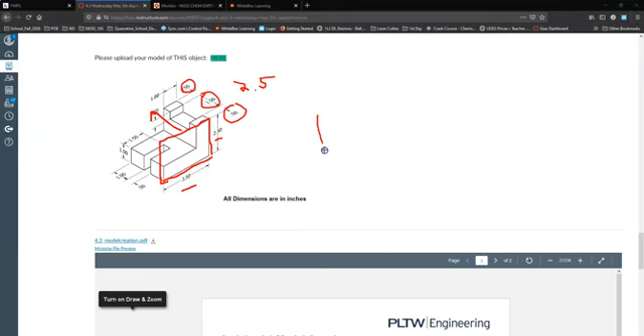So we're going to make a rectangle in Fusion that is 3.5 by 2.5, and then we're going to extrude that 2.5 as well. Then we're going to come back and start to make some cuts. We'll cut out this shelf, and we'll come back and cut out the 2 notches.

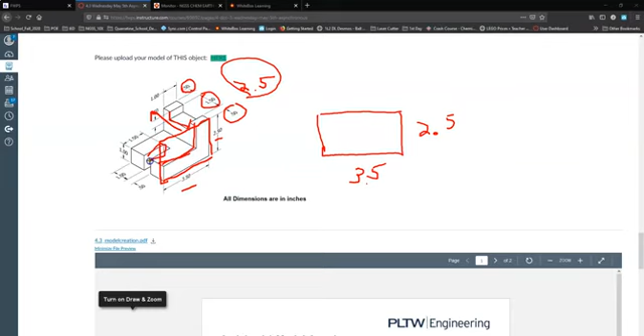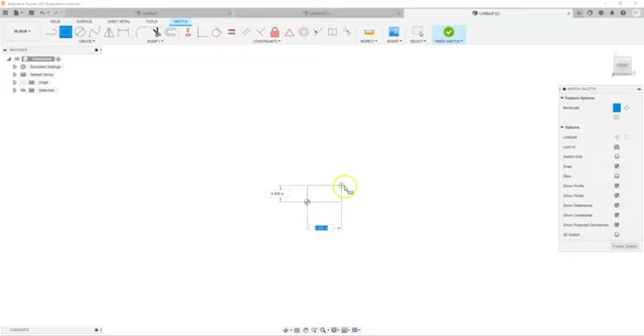Okay, I'm going to start a new part, and I'm going to start with a 2D sketch in the upper left hand corner. I'll pick a plane, I'll pick this plane, and I'm going to draw a rectangle. Take the rectangle tool, start at the origin, and I'm going to make a rectangle that is 3.5 by 2.5.

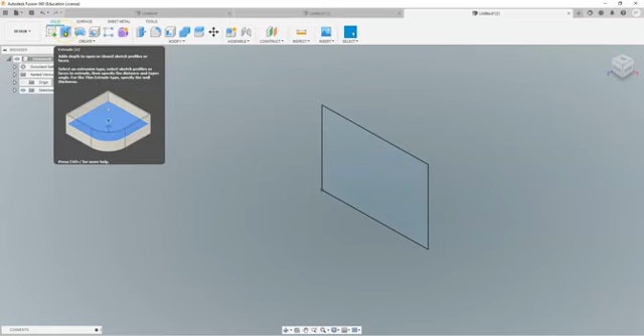All right, now I'm done with that sketch. I'm going to click finished, and I'm going to extrude that by taking the extrude tool in the upper left hand corner, and I want to make that 2.5 inches thick.

Okay, so there's the base block that we're going to cut the rest of the part out of. So let's go back and check in with our drawing.

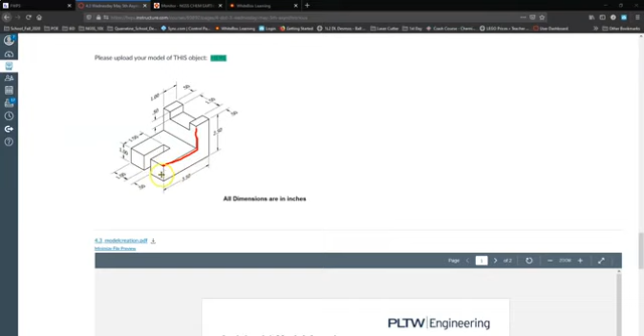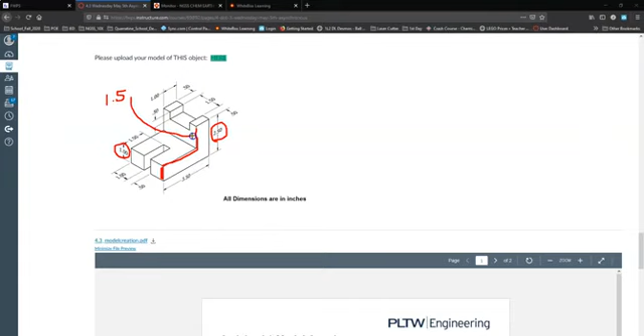Okay, so to get this shelf, I can see that the height of this shelf right here is 1 inch, and the total height is 2.5 inches. So that means this side right here is 1.5 inches high, right? Because the total is 2.5 minus the 1 inch high shelf, that means what's left over is 1.5.

And that makes this final longer shelf. If the whole piece is 3.5, and we come up here we can see this top ear here is 1 inch, that means this shelf is 2.5. And the height here, one more time, was 1.5. So what we're going to do is we're going to draw a rectangle that's 2.5 by 1.5 on the part that we have, and then we're going to do an extrude cut. We're going to cut that piece off.

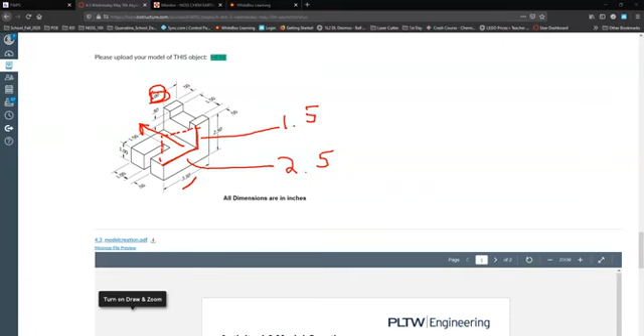Okay, so here I am back in Fusion, and I want to draw that rectangle on this front face here, and then extrude cut it. So I'm going to start with the sketch tool, and then I'm going to choose this face, because I want to draw the rectangle on that face.

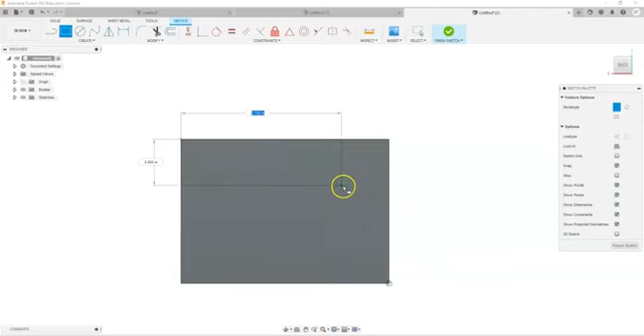You could use your scroll wheel and your mouse to kind of zoom out and then zoom in. It follows your mouse, so be mindful of where your mouse is pointed when you zoom in and out. And that's kind of one way to steer around your part. So I'm going to come up and take the rectangle tool. I will start the rectangle in the top left corner, and I'm going to make it 2.5 inch in its long dimension by 1.5 inch in its shorter dimension. So 2.5, I'll press tab, 1.5.

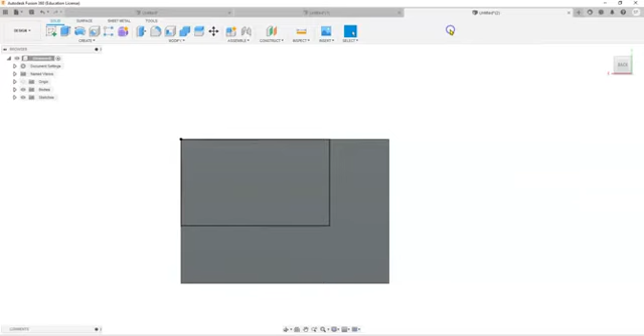Okay, so this rectangle right here represents the slice that I want to cut out. I am done with my 2D sketch. I'm going to click Finish Sketch, and then I'll come over to the View Cube and press the Home button.

Okay, now I drew on kind of the back side of this, which is okay. I'm going to come over to the View Cube, click on it, and use it to rotate around just so I can see. And now I want to choose this rectangle and cut it with an extrude. So I'll come up to the extrude tool, select it, select this rectangle.

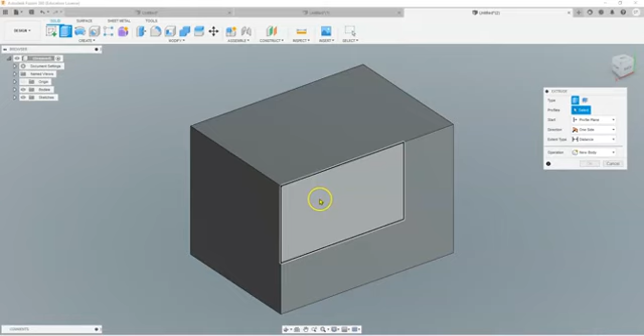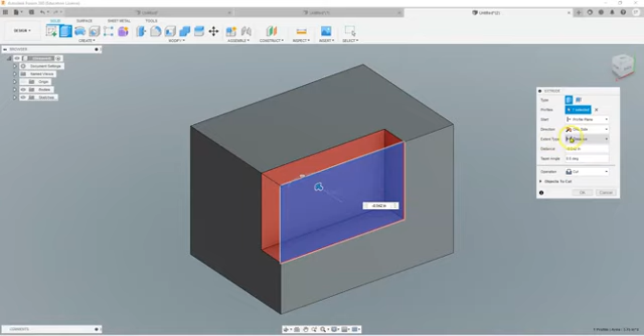The arrow shows the direction it wants to extrude, because we can add material, but I'm going to grab that arrow and click to start it the other direction to tell it I want to cut, not add. Then I'll come over to the extrude menu and choose an extent, the distance we want to cut. I'll choose all, because I want to cut through everything. We get a little preview.

I'll click OK, and that's good, right? This is getting closer to what I want. So we know we have a notch in the top and a notch on the front here to cut out. Let's go check in with the drawing.

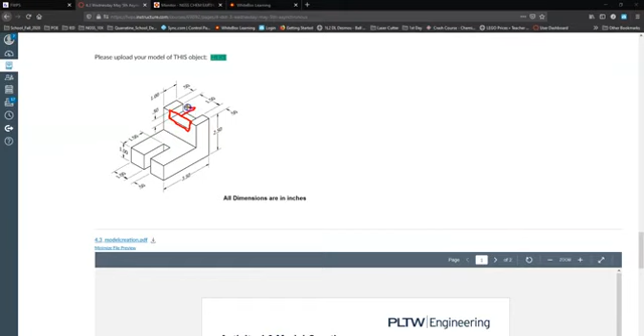So I'm going to try the top notch, and I can see that the notch is pretty much a rectangle that's cut out. We can draw on this front face here and extrude cut that out. I can see the longer edge of that rectangle is going to be 1.5 inches, and here on the side that's going to be 1/2 inch deep. So I'm going to draw a rectangle that's 1.5 by 1/2, center it. We can see in this dimension, the edge of the rectangle is 1/2 inch from the edge of the whole part, so we can use that to position the rectangle correctly.

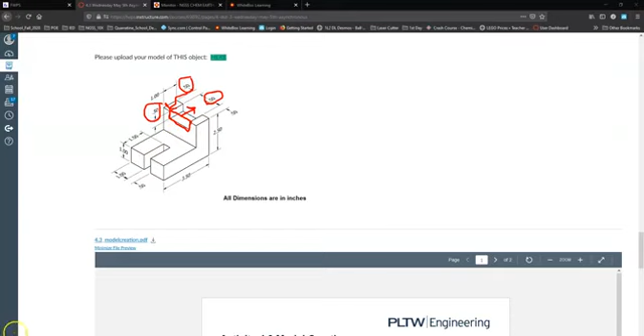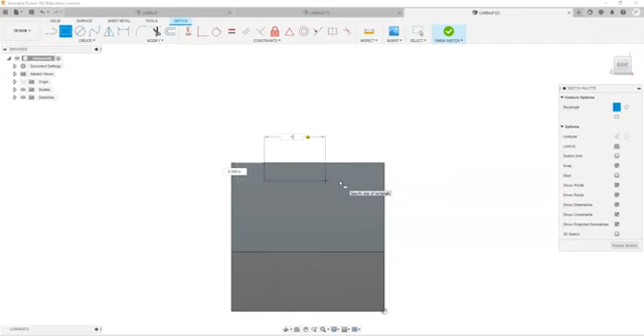So I'll show you that: 1.5 by 1/2. We want to draw on this face right here. I'm going to choose the sketch tool and choose this front flat face to draw on. It orients itself. I'm going to come up to the rectangle tool and start on that top edge and draw a rectangle that is 1.5, press tab, and 0.5.

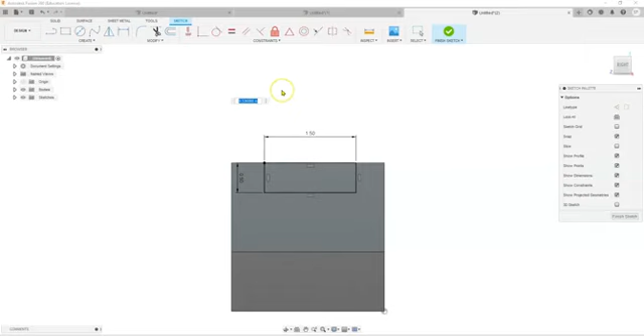So that notch is the right size, but I want to make sure it's in the right position as well, which is 1/2 inch from the left edge here. So I'm going to choose the dimension tool and select the one edge of my rectangle and the edge of my part. That can come up and place the 0.5 dimension, and that shifts the rectangle to be in the right spot. I'm going to click Finish Sketch. I'm done with that, and here I can see this rectangle is defined.

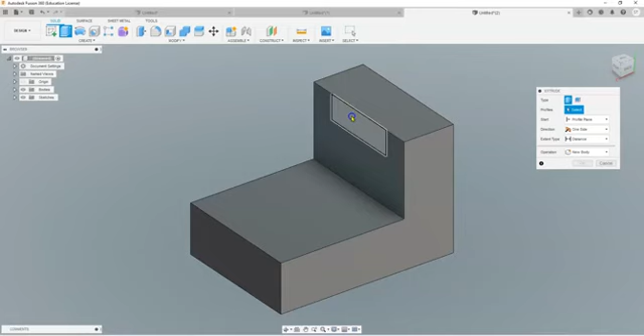I'm going to use that to drive an extrude cut. So I'll take the extrude tool, select it, select that rectangle, grab the arrow and start it in the cutting direction. Then I come over to the extrude menu and choose extent all, so it cuts the whole way through, and press OK. And there we have it, that upper notch.

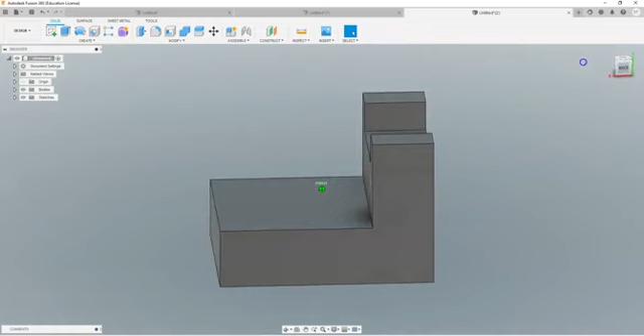Okay, almost done. We've got to cut a notch out here in the front. So let's go check in with the drawing.

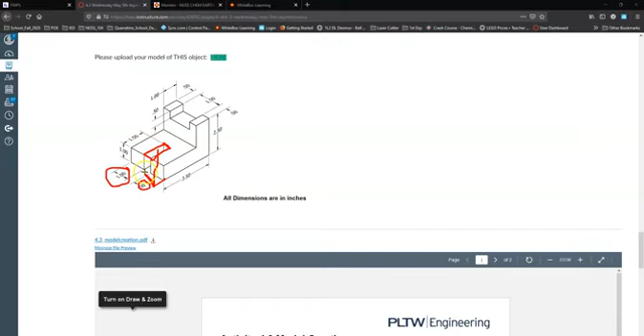I can see this front notch has a dimension of 1.5 inches deep, and here it is 0.5 inches. So we can draw a rectangle that's 1/2 inch by 1.5 inch. The edge of this rectangle is 1 inch from the edge of the part, and then we can extrude cut that down through the part. So, 1.5 inch by 1/2 inch, 1 inch from the edge, and then we'll cut it through.

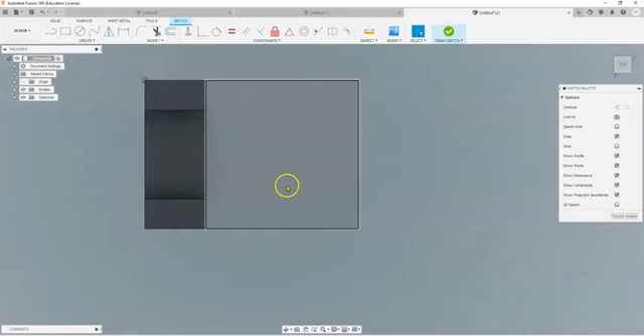I'm going to choose this front face, go up and choose my sketch tool, click on this top face here - not front, top face. Then I come up to the sketch tool again and choose the rectangle drawing tool. I'm going to start here on the right side, and on this top face draw a rectangle that was 1.5, tab, by 0.5 inches. There's that rectangle.

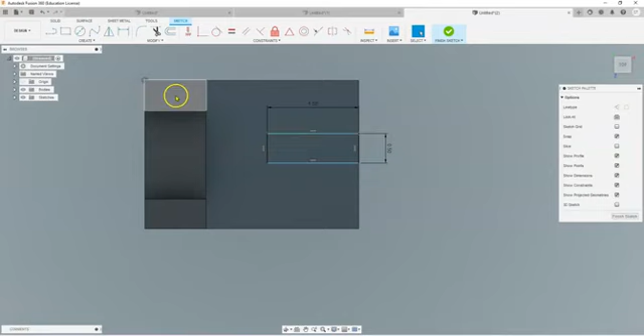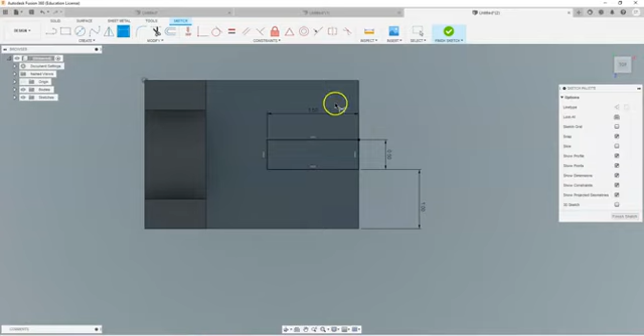I don't know if it's centered yet, so I'm going to choose my dimension tool. Remember, we can select the one edge of it and the edge of the whole part, and we know that dimension was 1 inch. There we go, it shifted the rectangle to be in the exact correct position. We'll click Finish Sketch. And we can see here we have the rectangle we need to drive that extrusion down.

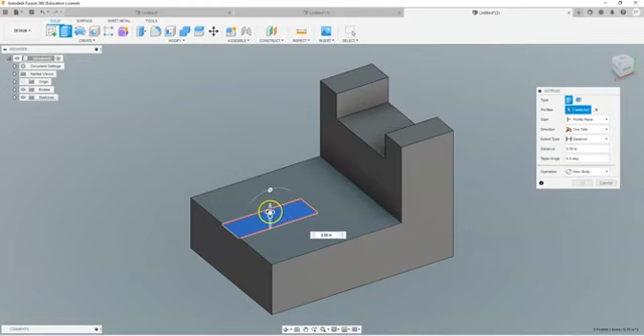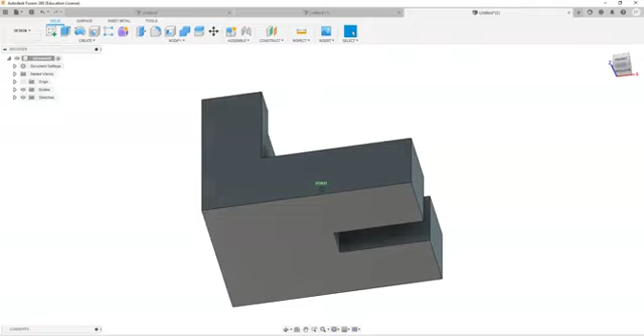So I'm going to select the Extrude tool, select that top face, grab the arrow and start to move it into the cut direction, then choose an extent of all. Finish that cut, and there you have it - that piece exactly, precisely modeled. Okay, that is ready for manufacture.